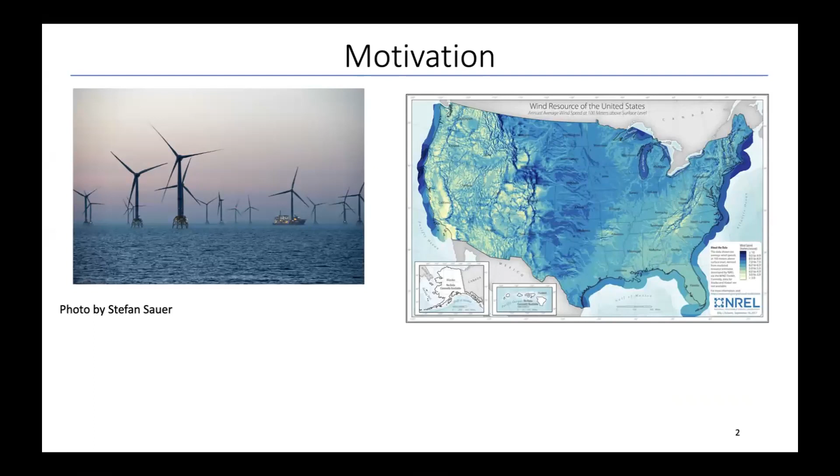So the first question is, why offshore? If you look at this map here on the right, you can see a resource map for wind speeds. Both the east and west coast of the United States have very high wind speed, which is suitable for wind energy extraction. This is the wind speed at the hub height. And the second thing, as you can see on the left, there are no mountains, no land, no houses. It's a lot of available space to build these turbines. So you have faster wind speeds and more space, so you can generate more energy.

And there is a national target in the US where you want to have 30 gigawatts of energy by 2030. And we do have that much capacity. Currently, the estimated offshore pipeline is around 40 gigawatts. So we are going in the right direction to generate more clean energy offshore.

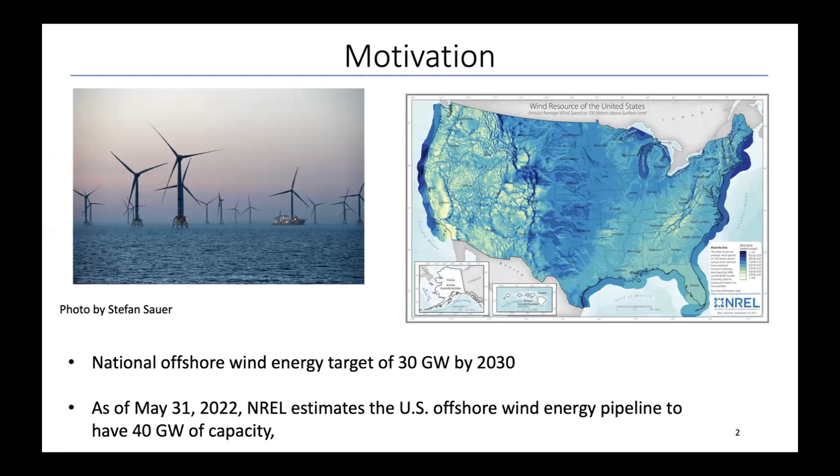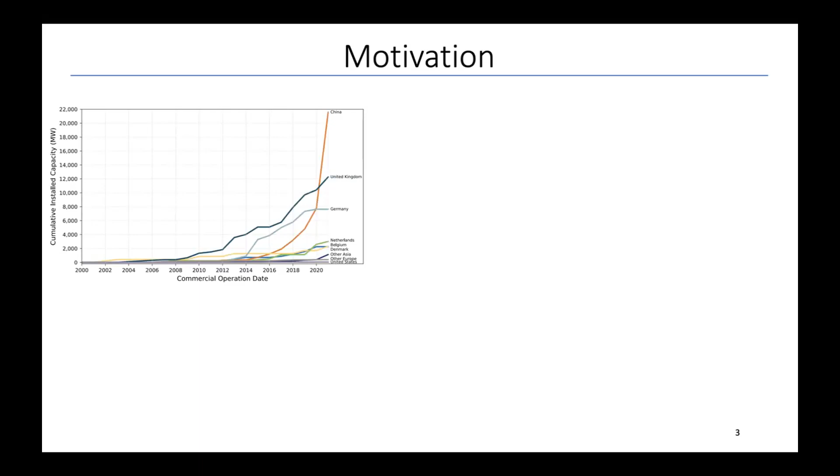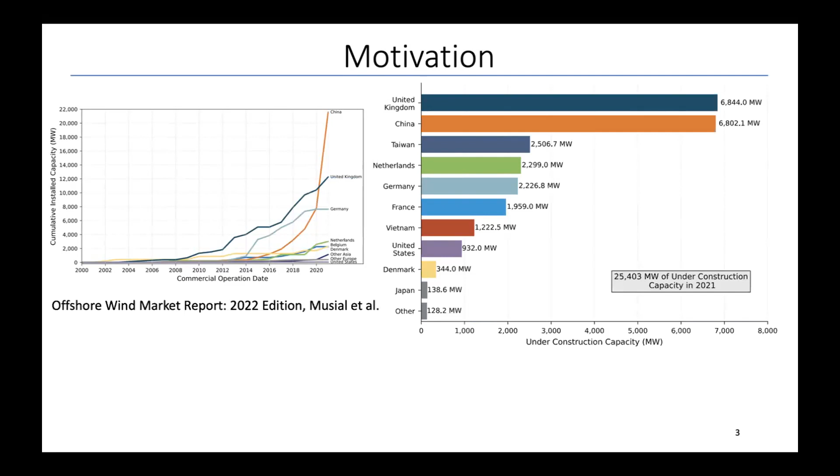If you look at this graph here, you can see that historically the major leaders for offshore wind energy have been China and UK, and the US is somewhere down in the bottom. But this is improving. There is a lot of under construction capacity in the US as of 2021, and this number is just going to keep growing. The hope is we also have this exponential rise that matches the other graphs up there.

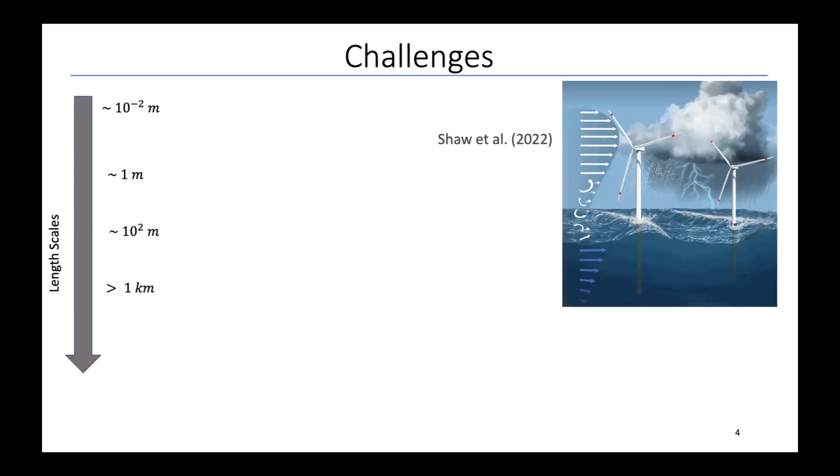And the main challenge is something called separation of scales. You have processes happening right from the centimeter scale, where you have the near surface wind-wave interaction that controls momentum transfer from the waves to the wind and vice versa.

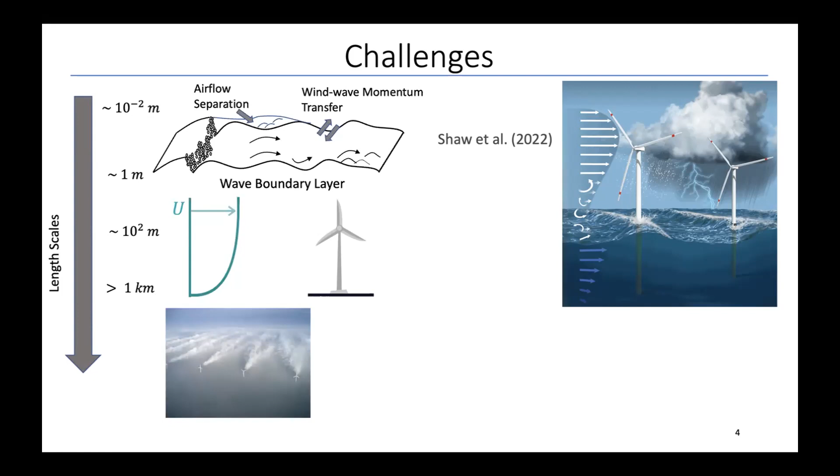Then the next thing is you have the boundary layer itself and wind turbines, which are of the scale of, say, hundreds of meters. You need to resolve both the small part and the large part. If you go one step further, when you have these large offshore wind farms, you have these giant wakes of the order of a few kilometers that you also need to account for, because these wakes interact with each other and influence the total power you can extract from these offshore winds.

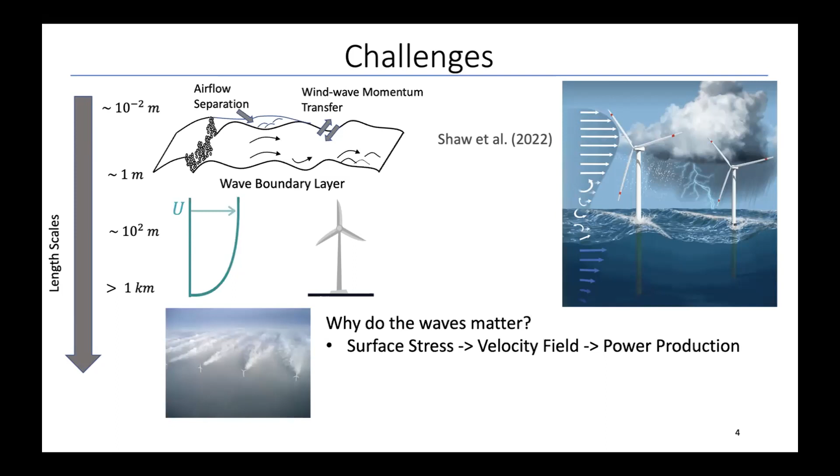Right? So the question I want to address here and talk about today is, why do the waves matter? Very simply, what it does is it sets what the surface stress of the ocean is depending on the wave scale. And what that influences is the velocity profile in the boundary layer. And the power is proportional to the cube of the velocity. So depending on what velocity you get at the hub height, you will predict power. So this is something that is controlled by the system.

The second thing is, you can also have direct influence of the waves on the turbulence and on the flow in the atmospheric boundary layer, as it extends to around a wavelength in height. And if you go further offshore, you can expect waves to be around 30 to 60 meter wavelength. So you can see that it's a considerable portion of the boundary layer that is affected by waves. You even have rogue waves or swell waves, which are generated by storm systems, that could be of the order of 100 meter wavelengths. And so that can also directly affect what's happening at hub height.

These control the power extracted. It informs what kind of control strategies you need to use in terms of pitch or torque control for your system. So it's important to study. And a very obvious effect that I've left for last is, when you have floating turbines, you need to know what the waves do, because that defines your wave-structure interactions, fatigue, and loads.

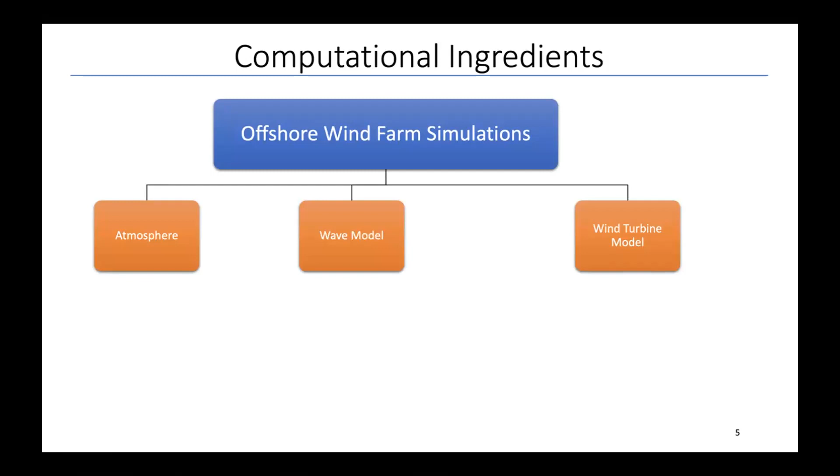So my approach here has been mostly computational. To tell you what computationally modeling an offshore wind farm entails: you need something to model the atmosphere, so the atmospheric boundary layer flow. You need something for the wind turbine. And finally, you need something for the waves. So you have different subsystems that you need to couple and talk to each other so that you get this final offshore wind farm simulation.

Typically what we do for the atmosphere is use something called large eddy simulation that I'll talk about soon. For the wind turbine model, you can do different things: actuator line, actuator disk. The difference mainly is how accurate you want the near-field characterization behind the wind turbines to be. That chooses the method. For now, I want to focus more on low computational costs. So how can we do a lot of these simulations for realistic conditions to give us an input? So we mainly will use actuator disks.

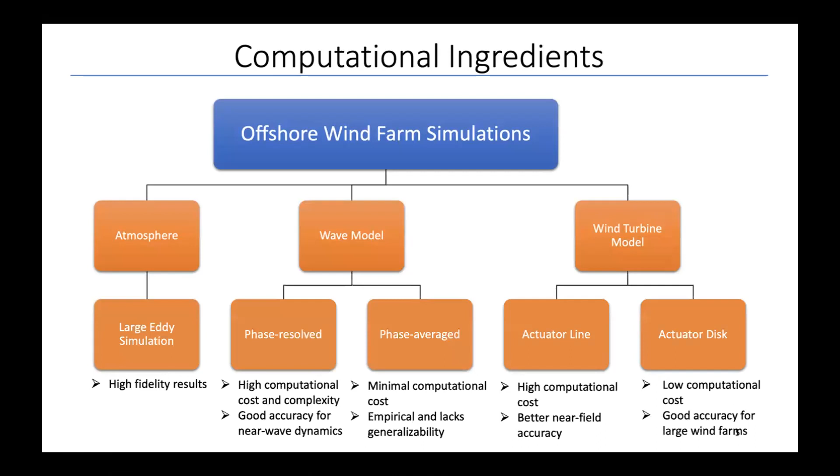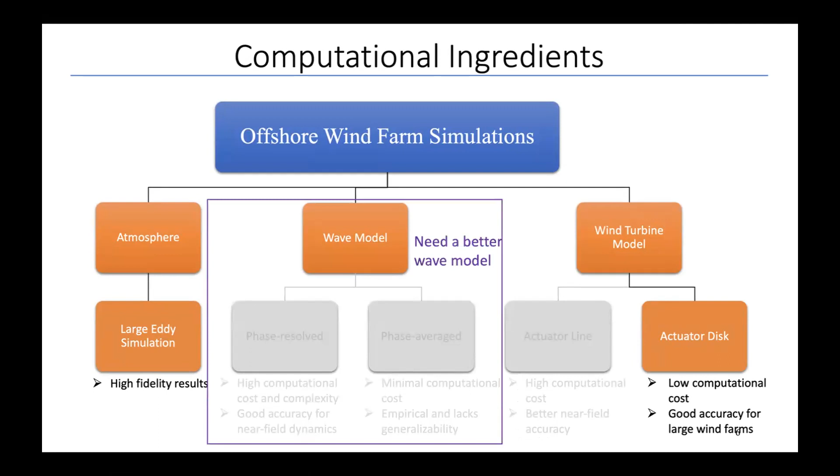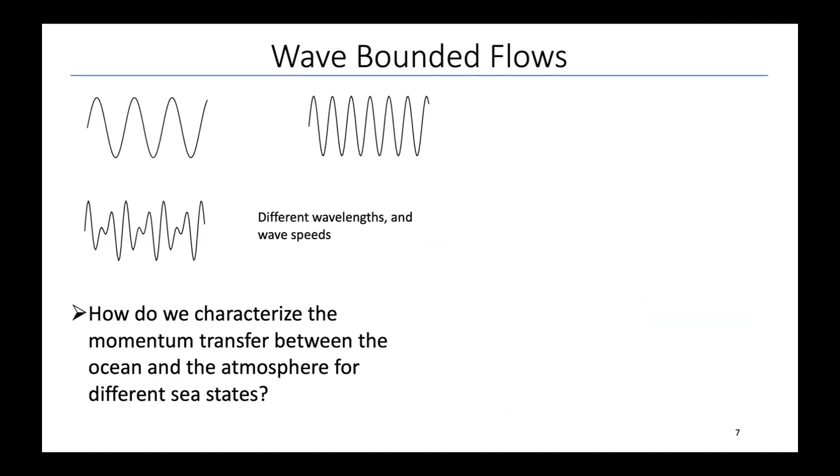For the waves, again, you have different fidelity models that you can use. And again, the trade-off here is in cost. But the problem is that the low-cost models don't give good accuracy. So we need a better wave model to address the effects of the waves on the boundary layer. What I'm going to talk about is something called wave bounded flows. What that means is, we want to characterize how different sea states or wave shapes influence the atmosphere

in terms of momentum. The way this is done typically is you specify the surface stress, and that surface stress depends on the wind velocity and a drag coefficient. In the atmospheric boundary layer, you can assume your velocity profile roughly scales logarithmically, and you can use this information to extract what that stress is. So you see, I've replaced the drag coefficient by the term in the brackets here.

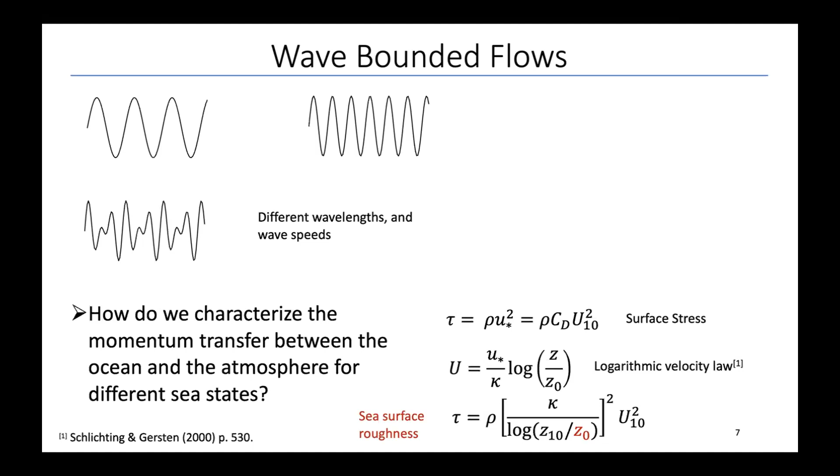Now the key thing that you need to do is to define the z0, which is the sea surface roughness. It tells you how rough or smooth the ocean surface is. And that is what these two types of wave models do. The phase-resolved one numerically resolves each and every wave and calculates things extremely accurately, but with very high cost. So you can't realistically do large-scale simulations with the phase-resolved model.

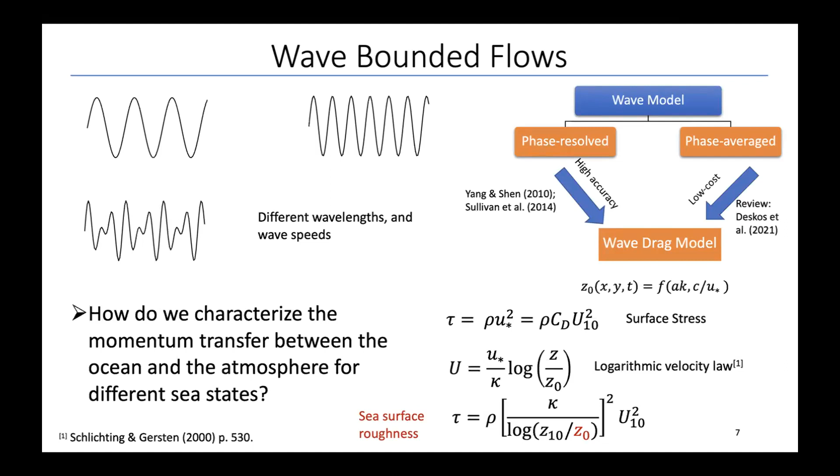The phase average one throws off all the phase information and uses some sort of empirical formula to tell you what that Z0 is. But what we want to do here is to have something that will keep the phase information, but also give you information about the sea states and how that influences the boundary. So how do we do this?

So we use a very simple approach that we say the effect of the wave can be treated as a hydrodynamic force being applied on the air side. And that force is proportional to the incoming momentum. So in simple terms, what this means is, if you have a flow moving from left to right and you have an obstacle, the obstacle is going to extract energy from the flow and impart a drag. And in this case, the wave is that obstacle.

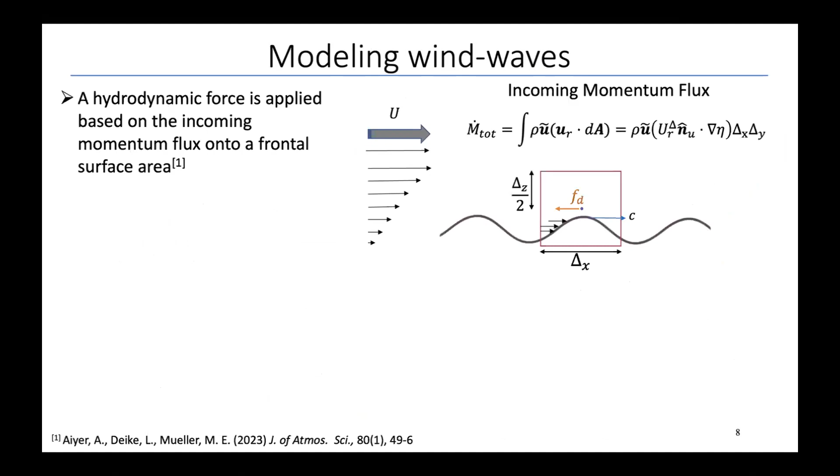So you can do a simple control volume analysis, and you can calculate what is incoming momentum fluxes with the control volume moving with your wave. And you finally end up with an expression like this. It's not that important that you understand every term, but roughly you have a drag coefficient that is dependent on the wave steepness, that's the amplitude times the wave number. You have some term which is proportional to the relative velocity. That means how fast is your airflow compared to how fast is your wave moving.

Which seems obvious, right? If your wave is not moving at all, you'll have more drag. If your wave is moving as fast as the wind, the drag should be less because it's all kind of moving together. The relative velocity is zero. And then you have something that depends on the wave slope. So this is where you're incorporating all that wave phase information. And the way we do it in our simulation, you just have it at the bottom. So you're using it as a surface stress at the first grid point, where your waves are like these moving roughness elements imparting drag on the flow.

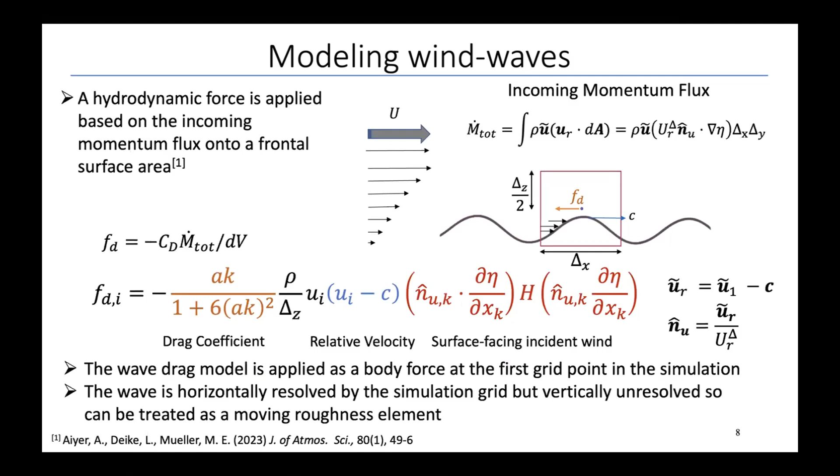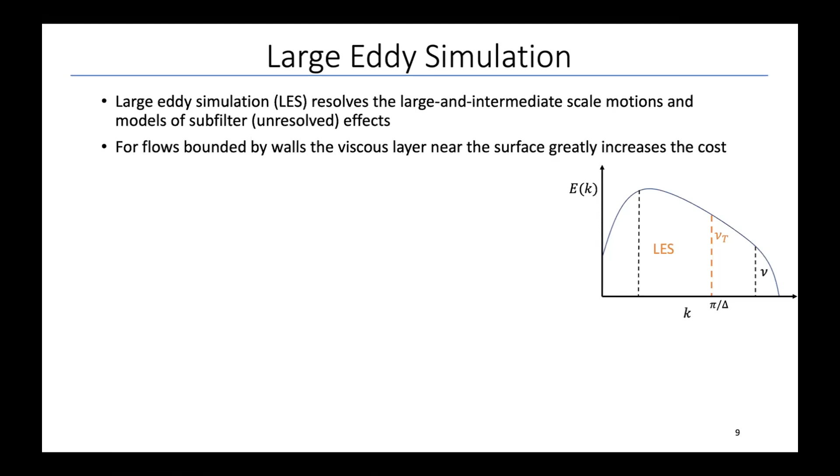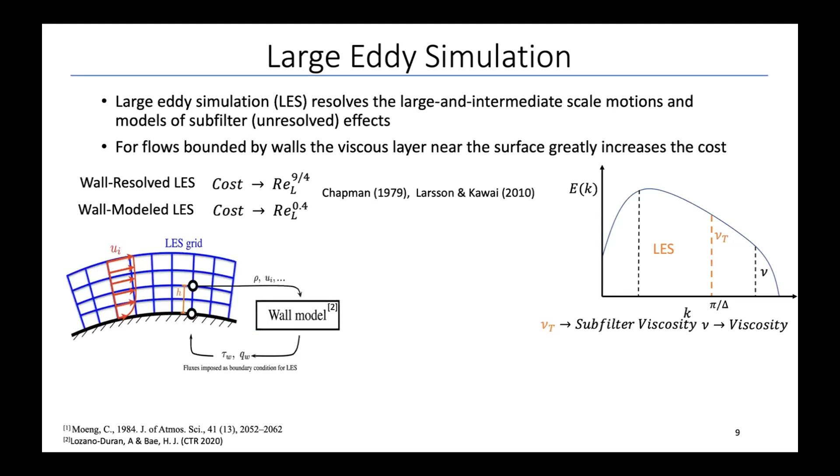But when you add a boundary in that flow, for example, the waves, it introduces another small layer right next to the boundary, which again becomes expensive to solve. So you go one step further and you want to model this effect also. And that's where wall modeled LES comes in. What that does is it takes information from the resolved part of the flow, so the large scales, which are much easier to compute, and it uses that information to specify the effects of the unresolved portions at the boundary. So you're not really solving very close to the boundary, but you're using stuff from further away to inform what that stress would be at the boundary.

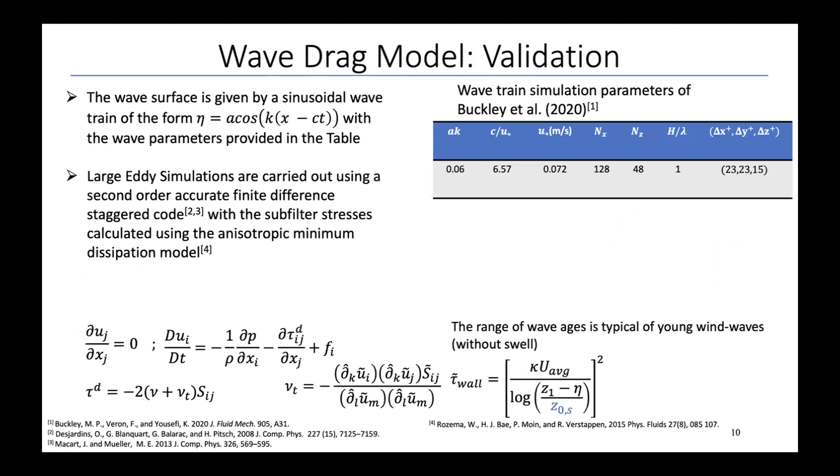Okay, so putting this all together, what you finally have is you're doing these large eddy simulations with a simple monochromatic wave at the bottom. And we use the wave model to specify the wave drag force, and then we want to see whether we can validate this with actual experiments.

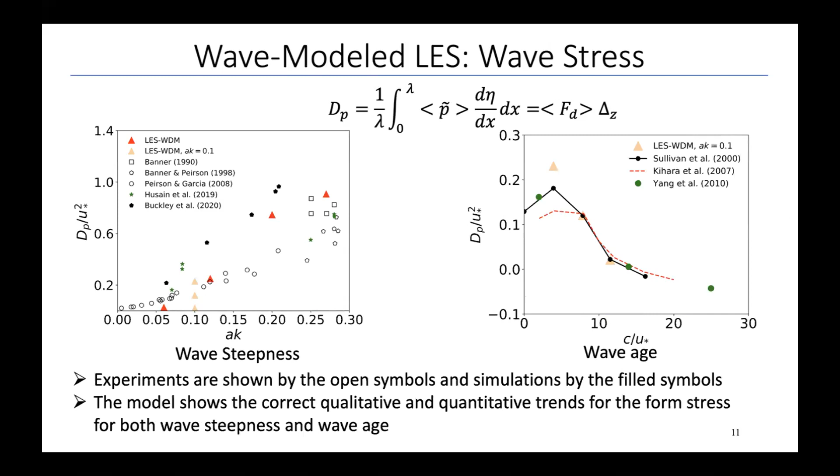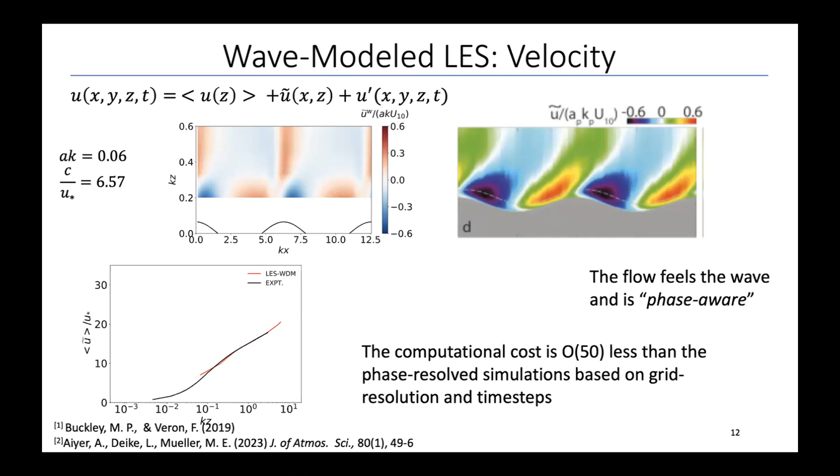And this doesn't mean you completely replace the phase resolved simulations. This means that if what you care about is not like 1 meter away from the wave surface, then you really don't need the phase resolved simulations to do the waves, and this model will work very well.

So now what I showed you is for a simple sinusoid, right? But what do you do in realistic ocean conditions? It's not one sine wave traveling along in a simple direction. What you really have is multiple waves of different wavelengths and frequencies, and they're moving in different directions also. And the way that is typically characterized is using a wave spectrum. So that just tells you how much energy is there in each frequency of the wave. And this is something that you can measure in the ocean and give you what the spectrum would be in a particular area. And so now the question is, how do you incorporate this spectrum into

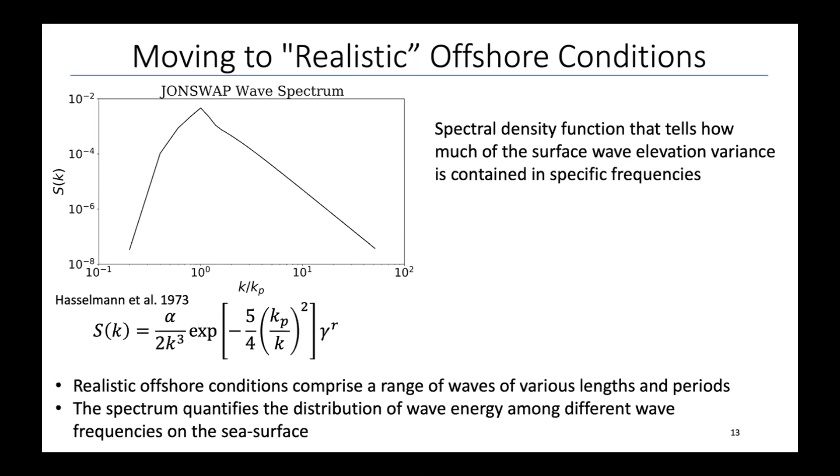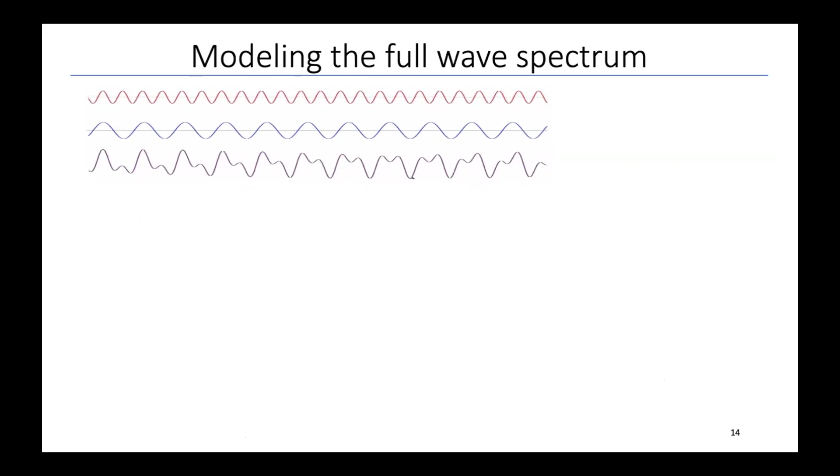Okay, so now if you want to model the full spectrum, for example, I've just shown if you have two waves and you superpose them with a random phase, what you get is something like that. So it has some kind of complexities to it. Now imagine if there are like 50 waves or 40 waves of different frequencies superposed together, you'll get something way more complex. And so the way we do this is we first reconstruct the sea surface elevation by superposing a bunch of waves. And the resolution we choose is whatever we can resolve on a grid. So based on a computational grid size, you have a max resolution that you can resolve.

And you can see on this, this is just a representative sketch, but there'll be a lot of portions of the wave that you can't resolve. So a lot of small scale fluctuations that won't be represented on your grid. And we need to take care of that also, because the total force on your surface doesn't depend on what you're simulating, but what's there in reality. So it's a sum of both your resolved component and your unresolved component. And so now the question is, how do you put this unresolved component back into your model when you have these realistic ocean cases?

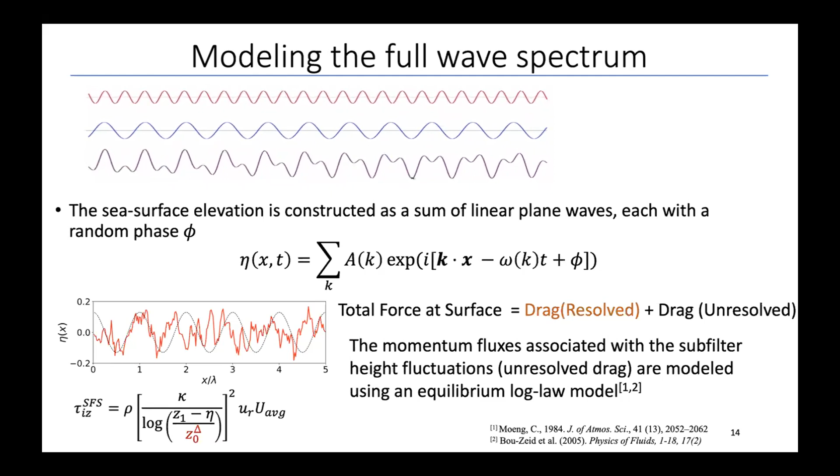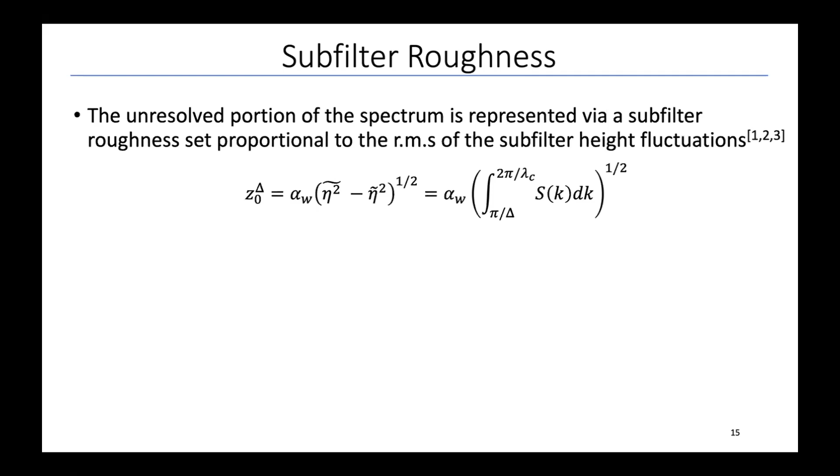And we use a trick of self-consistency here. So what that self-consistency condition is: regardless of what grid spacing I use in my simulation, the total stress at the surface just has to be the same. So if I resolve something at scale delta or I resolve it at scale 2 delta, the total average stress has to be the same, because it's the same wave.

And you get this by using this equation, you get a self-consistency with one unknown, which is alpha, and you can solve for it during the course of your simulation. So you dynamically update alpha as your simulation progresses, and you don't have to make any assumptions of its particular form. The only assumption here is that alpha is the same at both scales. So there is a scale invariance assumption baked into the self-consistency condition, that your alpha doesn't change with respect to scale.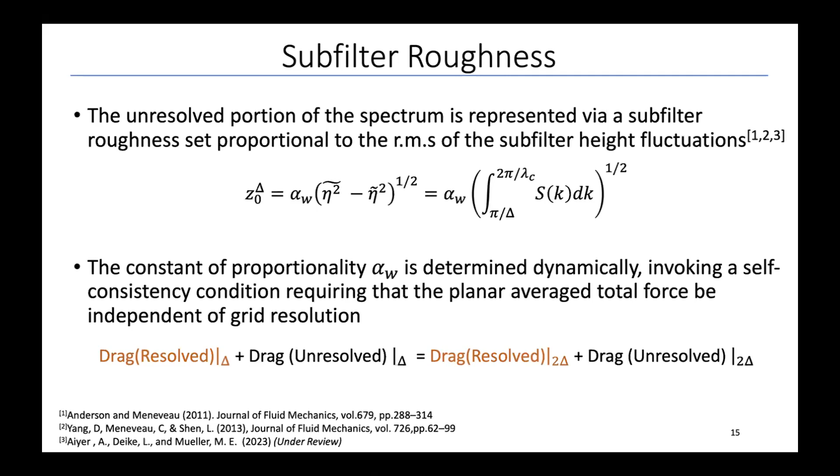Okay, so now we put this all together. I've shown you what to do with the atmosphere, what to do with the waves. Now, finally, you have wind turbines.

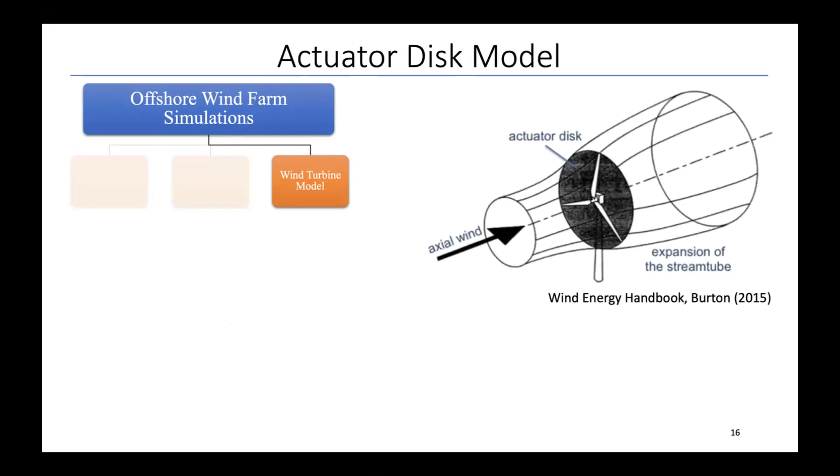We use a very simple approach called the actuator disk model. What it does is it says that the wind turbine is like a drag producing disk that extracts energy from the flow. And then you can calculate what that drag is, based on simple momentum theory, to be proportional to the area, the square of the disk average velocity, and some thrust coefficient. So this is the wind turbine model.

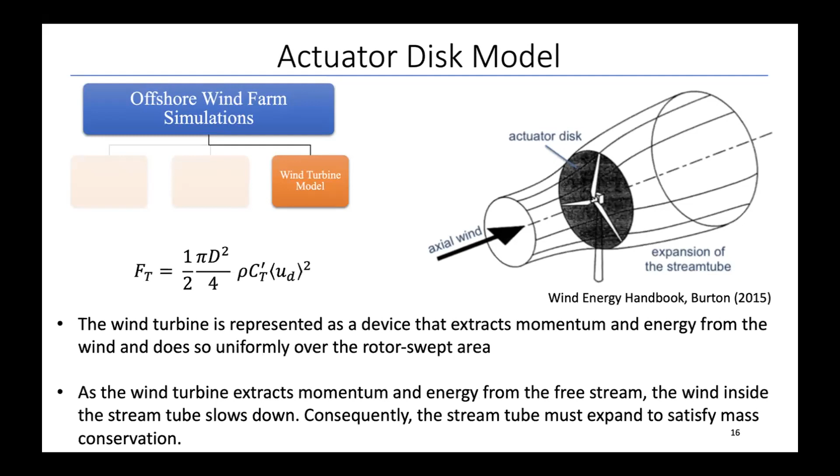And the thrust coefficient is something that depends on your blade, the particular airfoil you use. And in simulations, we're kind of agnostic to it, because this is information you get from experiments and tables of what the lift and drag coefficients are for particular airfoils.

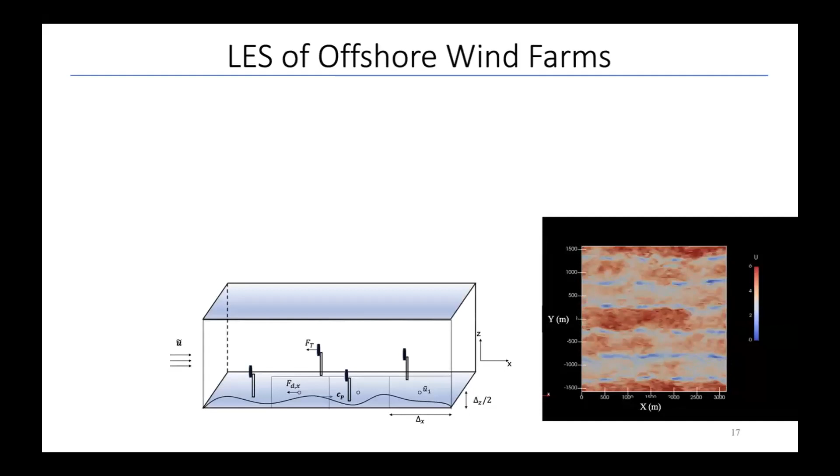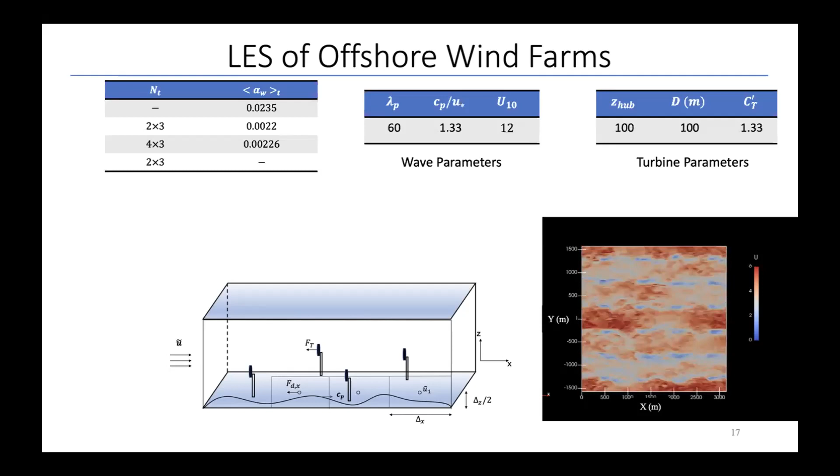Just to give you some idea, I have a simulation here for an offshore wind farm, just at different configurations. The important points here: you have a wave of wavelength 60 meters, your turbine hub height is at 100 meters, and the diameter of your rotor is also 100 meters. So it's a 100-meter high turbine encountering waves of 60-meter wavelength. This is typical for offshore, deep offshore conditions. Okay, so this is other grid kind of details.

And so the first thing you want to look at is just how does the flow look like. You can see that it's a highly turbulent flow. You have a wake structure developing behind the turbine, that initially you have a low momentum zone, and then due to turbulent mixing, that wake starts dissipating.

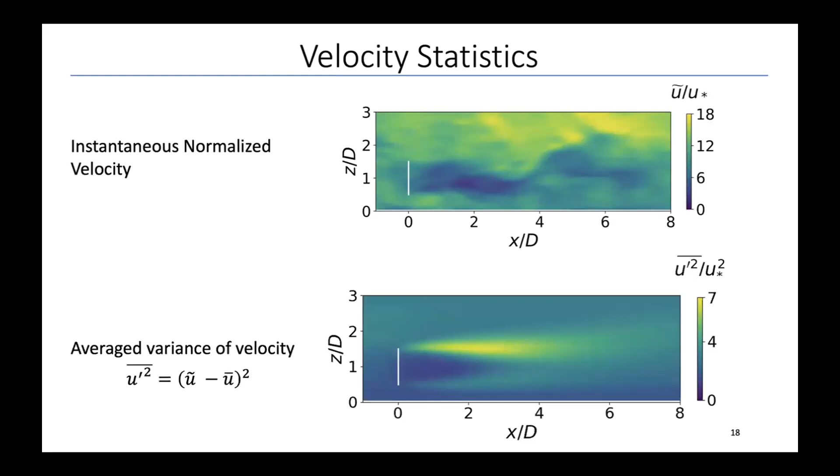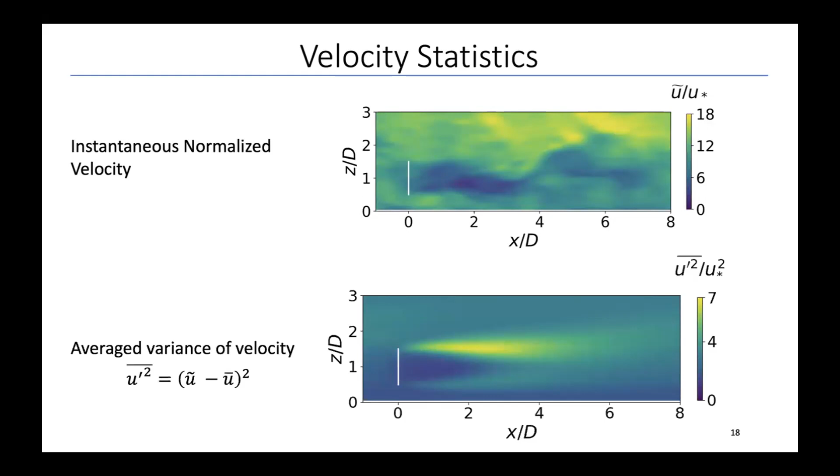And then if you look at the velocity variance, this is a measure of the turbulence in the flow, so it gives you what turbulence intensity is there in the flow. You can see that it's very high near the edges, as expected — you have more turbulence and more mixing near the corners. Also the magnitude of this increases as you go away from the ground, that's because your velocity is also increasing. So you have a faster velocity hitting an obstacle versus a slower velocity hitting an obstacle at the bottom and top edges of the turbine.

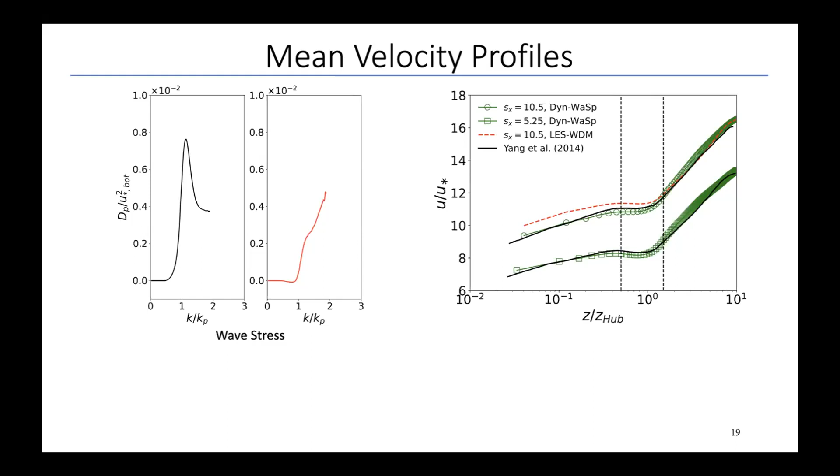So you can see the discrepancy in the lower half between the simulations and the one without the dynamic model. In the upper half, everything's roughly equal, and that is expected, because you don't expect your waves to affect something 1,000 meters above the surface, which is the height of the domain. But you expect it to have some influence at the hub height, which is in the middle over there.

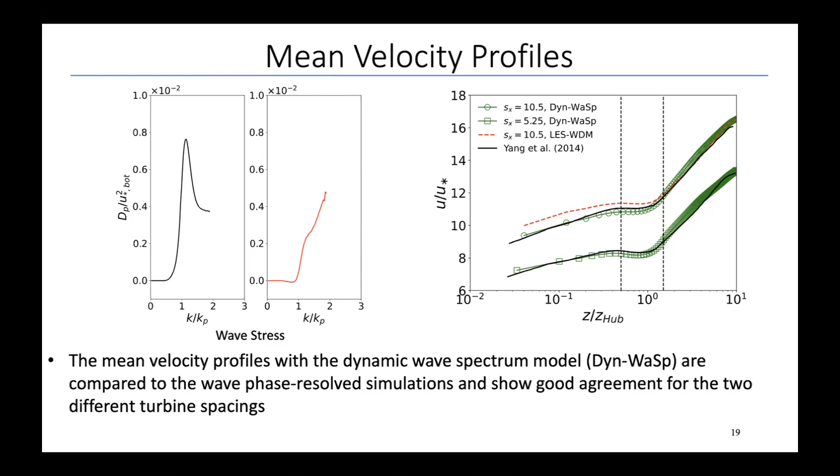So finally, I hope this can convince you that the dynamic model is necessary, and also you can simulate the full wave spectrum in this form for realistic offshore conditions.

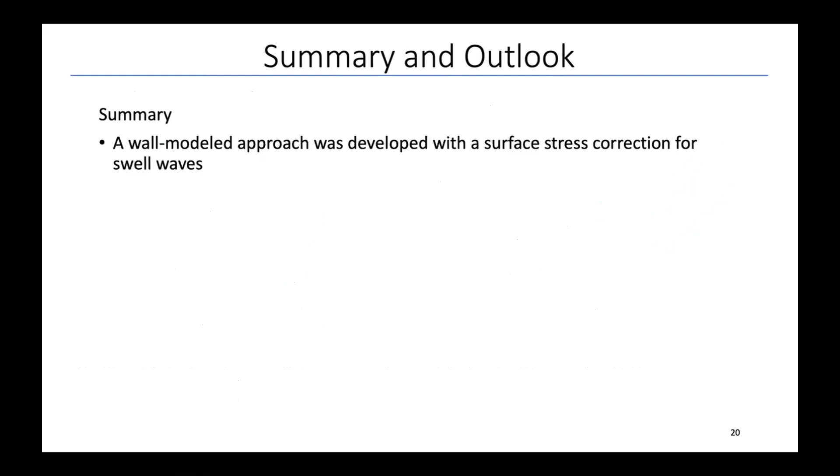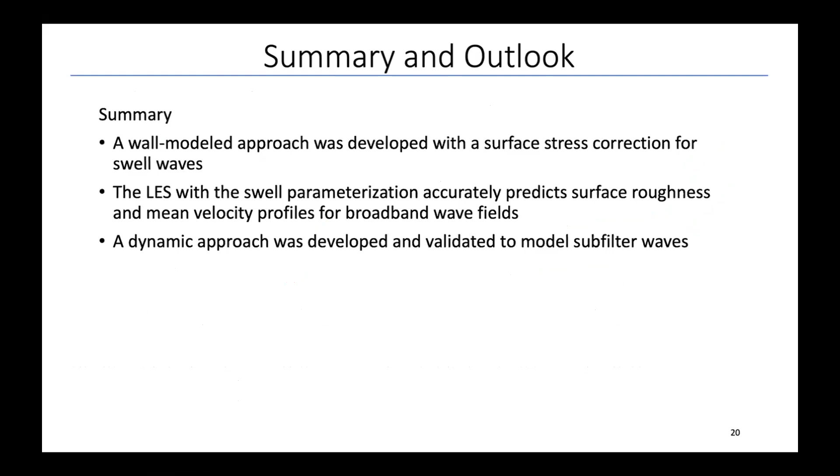Just to quickly summarize, this is a wall modeled approach where you don't really have to resolve all of the waves, but you have a physics-based method to apply the correct stress. You can do it for both simplistic, narrow-banded, and broad-banded spectrum. It doesn't derive the spectrum, but given a particular spectrum for the place you need to study, you can use this model.

This dynamic approach allows you to use it without having any kind of empirical tuning constants. The main takeaway for the wind part is, now you have a model that's 10 times cheaper than what people do for wind turbines. Wind turbine simulations are anyway very expensive, and when you add the wave solver, it becomes even more expensive. So it's 10 times cheaper just based on grid spacings you can use with this model.

Something I'm not showing here, which also adds to the cost, is all these phase resolved models have a separate wave solver. So they have something for the airflow, but they have another potential flow solver for the waves that also adds to the cost. It's also very simple to implement because you don't have any terrain following or remeshing stuff that you need to do. So these are things that can easily be taken and have portability across different kinds of simulation codes, and can be tested very robustly in that sense.

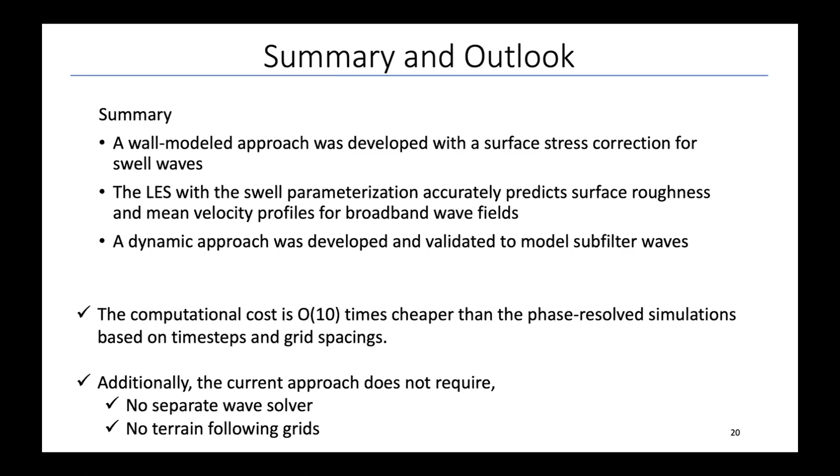So with that, I'll be happy to take any questions. Thank you.

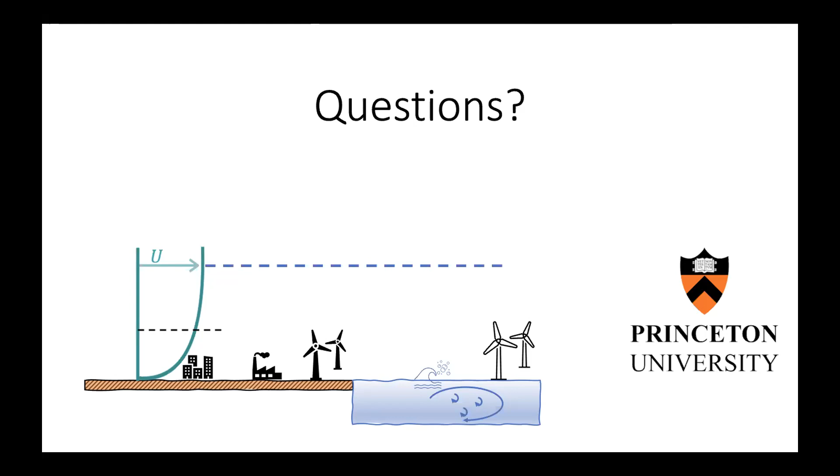You have two scalings for the computational cost, one that is Reynolds number to the 9/4 and the other 0.4. What's the difference between that?

Right, so when you don't do DNS, you don't have viscosity resolved. Technically, large Reynolds number LES is Reynolds number independent because you don't have any viscous layer you need to resolve. When you put a wall, you again get a Reynolds number dependence because you have a viscous layer near the wall, and so wall resolved LES is almost as expensive as DNS.

And now in wall modeled LES, you're again removing that viscous layer and modeling it, so you're again roughly Reynolds number independent, but it's like a 0.4 scaling, a very weak scaling. So the difference is just having the wall. Thank you.

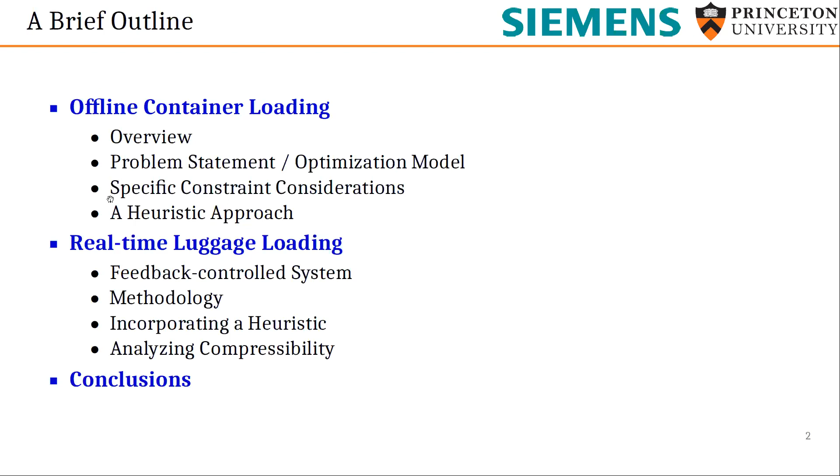And then I'll shift gears and talk about the airline application and the real-time loading of luggage, why that application needs to be feedback controlled, some of the methodology that we use in order to replicate that, what happened when we incorporated a heuristic, and then I'll end the talk talking about compressibility of objects and why considering that is really important to achieve some of the targets that we have. And then we'll conclude.

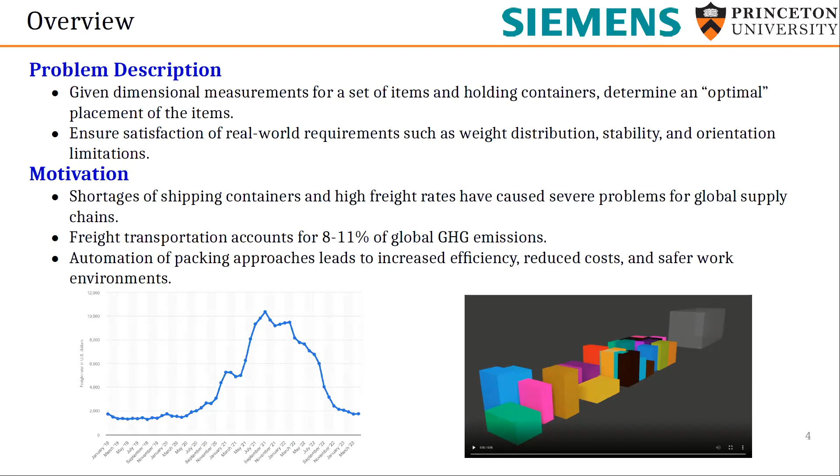On top of that, we know that 8 to 11% of global greenhouse gas emissions are due to freight transportation. And then as we get to the end of the talk, the automation procedures are, of course, designed to increase efficiency, reduce costs, and improve the safety of our working environments.

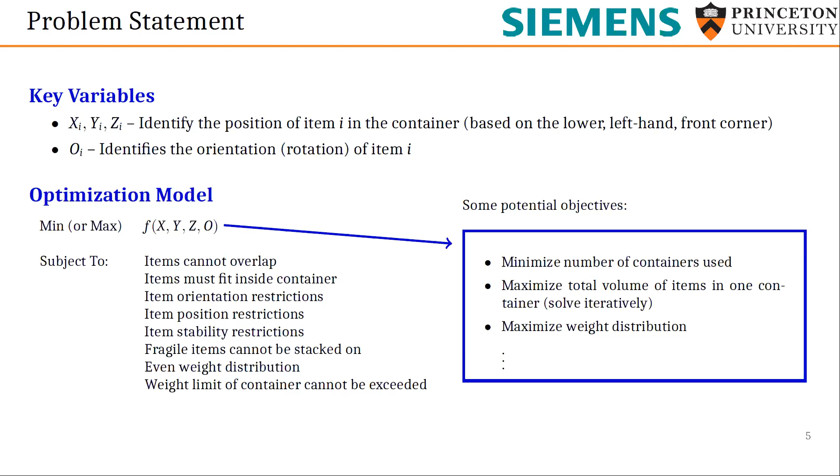So the novelty of this work really isn't the constraints that we're considering, although there is something to that I'll talk about in a moment, but really the fact that we're considering all of this stuff at the same time, right? Because in the literature, all these things have been proposed, but most applications don't consider them simultaneously. So there's a big challenge in trying to do that. So I'm going to highlight one of these in particular, and it's going to be the stability restriction, because for a couple of them, in addition to the fact that we're considering them all together, we also think of them in a little bit of a different way than they're thought of in most of the publications in literature.

So up on the top right here, you see an image of a packing application where stability restrictions aren't considered at all. Right, so you have objects that are like floating in the air, or they're almost definitely going to fall over as soon as we let go of them. And so, of course, there's a need for a stability consideration.

So the two things that are done in the literature are a vertex-based approach, where we pick some number of vertices that need to be supported. When I say supported, I mean they're either on the ground or there's an object directly below them that doesn't fall. Right, and so usually that number is 3 or 4. Or there's a percentage-based approach where you specify that a particular percentage of the bottom surface of an object needs to be supported from below.

So I'm going to do a couple of quick thought experiments to show you why these two approaches are a little bit lacking. So in this first one, you can see a side view of a packing scenario and a top-down view of the same thing. And of course, in a vertex-based approach, this is a valid packing, right? But as soon as you try to switch to a percentage-based approach, there's no way that you would ever want this to be valid, because there's probably less than 25% of the bottom surface that's being supported.

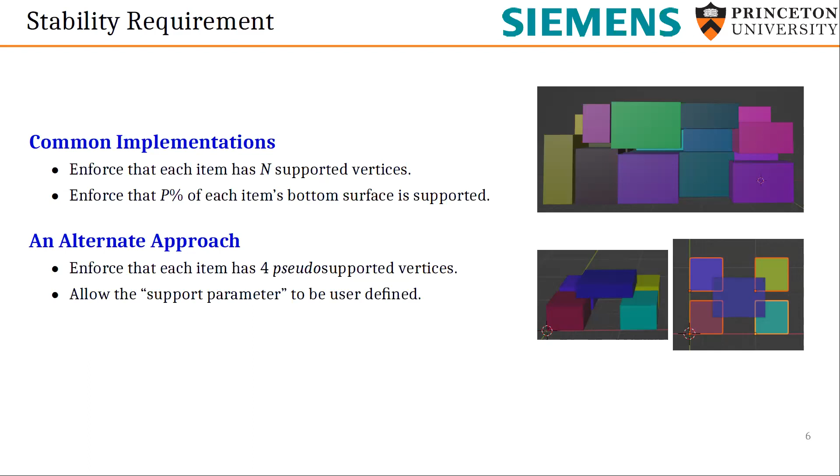And so if you take that approach, 25%, and you allow for other things to satisfy that same restriction, you're going to get a bunch of stuff that falls over, right? But now take an alternate view and a different packing scenario. So in this one, we've got a great percentage of the bottom surface that's being supported, but we don't have the 4 vertices, right? So you can see from these two scenarios that neither one of these two approaches is very holistic on its own.

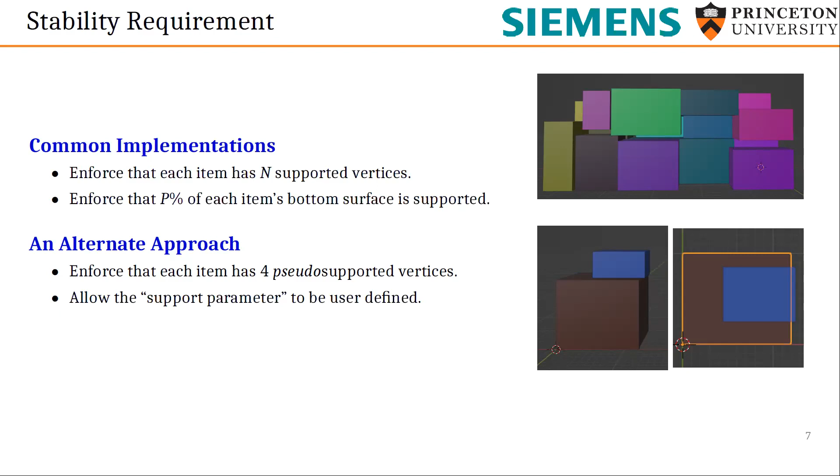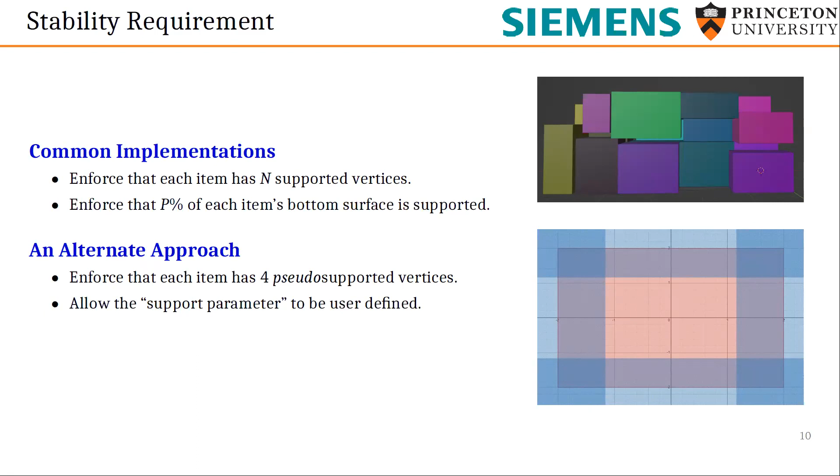So we did some other things for the weight distribution constraints and some of the other sets of constraints where we sort of modified the way that we thought about them. But again, the power here is that we're putting all of these things together all at the same time. So with that, we had a pretty good optimization model that we're happy with. And of course, the difficulty is with all of these constraints considered simultaneously, it takes forever to solve, right? So we implemented a heuristic, but not exclusively a heuristic, like it's frequently done in industry. So we merged the heuristic approach with our optimization approach so that we could get the benefits from both.

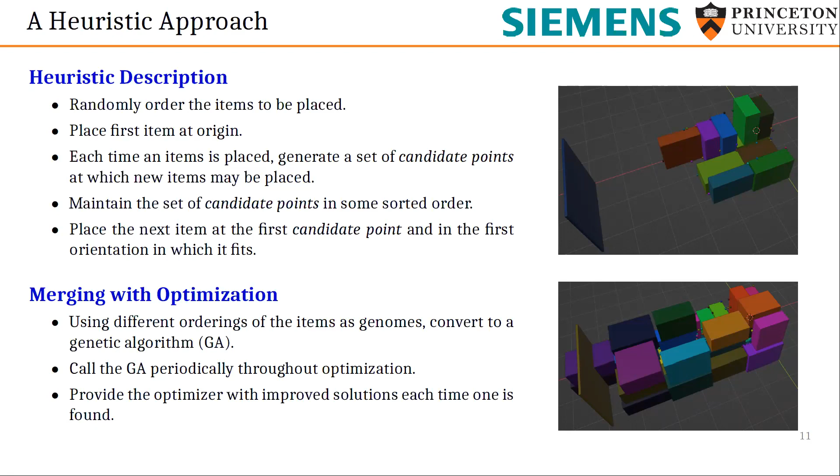The problem here is that the solutions, although they're valid and they're quick, they're not anywhere near optimal necessarily, right? So these are 25 items that should fit inside this container, but with the heuristic approach, this plate right here is supposed to be the back wall of the container, and 2 of the items don't fit, right? So we can merge the heuristic with our optimization by converting it to a genetic algorithm. So we change the order in which items are placed. We can call the genetic algorithm periodically throughout the optimization process using the optimizer's callbacks. And then we can provide those new solutions to the optimizer in order to help move it along.

So a couple of results here. This is the same scenario where I have 25 items I want to pack. Again, this solution is generated in a fraction of a second. Back here, what you're seeing is a couple of objects. They're not supposed to be floating in the air. They're supposed to be set on the ground in the back, so they're sort of saved to be packed in another container later.

If I run the same scenario using only the optimization without the heuristic and let it run for 5 minutes, I get a very different orientation for all of the items, but essentially the same result. There's a couple of objects that weren't able to be fit and need to be stored in another container later. But when I put the heuristic and the optimization together, this solution is generated in just about 30 seconds, where all 25 objects are oriented in such a way that they can be placed within a single container.

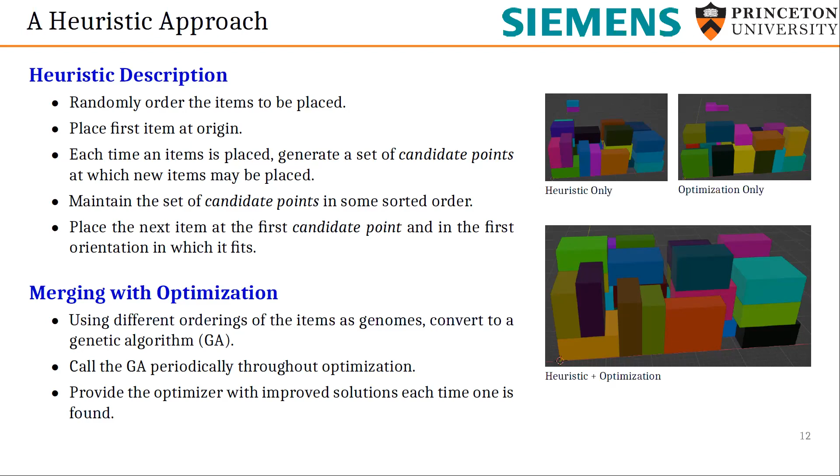All right, so here's where I'll switch gears and I'll start talking about automation of this process, and particularly an application for airline load. So after we've been working on this previous project for about a year, Siemens came to us and they said, hey, we have some colleagues over in Germany. They're working in our airport logistics division. And we think that the application that they're working on would be a great thing for your application. So your algorithm that you're working on is a really good foundation.

So the idea is that when people check luggage at the airline or at the airport, they're loaded into these unit load devices or ULDs. And currently that process is done by humans, right? So the objects show up on a conveyor belt and people manually load these ULDs. So Siemens said, we'd like to automate this process. We'd like to have robots, we'd like to have perception systems, video cameras, things so that we can get better tracking, so we can get better efficiency, we can save people from getting hurt and all these kinds of things.

And we said, okay, great, but why aren't you doing that already? And they said, these two issues, right? So deformability and slipping and toppling. Basically, the applications that people have been working on were very similar to what we had been doing, where you know all the items ahead of time, you come up with some packing structure, you start putting stuff in.

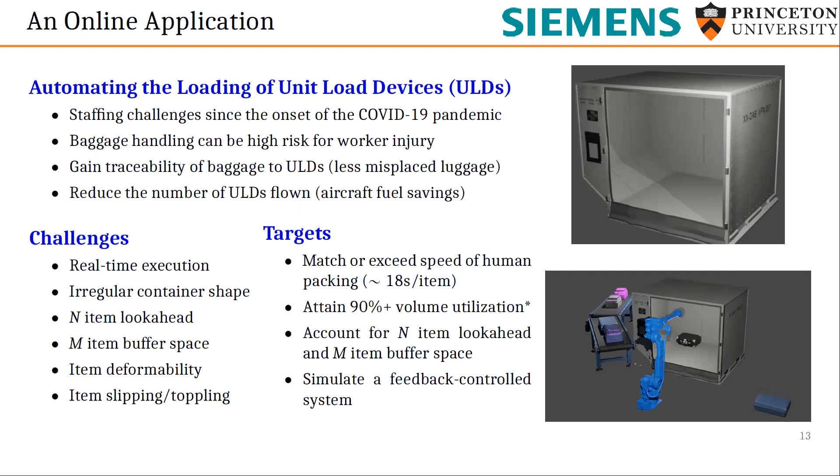So how does the feedback control system work? Well, basically we have a perception module that does two things. It scans luggage that's arriving on the conveyor, and it tells us what the dimensions of the luggage are. And then the other thing that it does is it scans the ULD, and it tells us about the current state of the system. So it tells us where things currently reside.

And then that information is passed to the packing module, which is our contribution. So we're using the Gurobi optimization software in order to determine a particular packing plan. And then that packing plan is shipped off to a robotics module that's tasked with actually implementing the plan. I'll give a little bit more nuance to the approach in a second, but that's the basic idea.

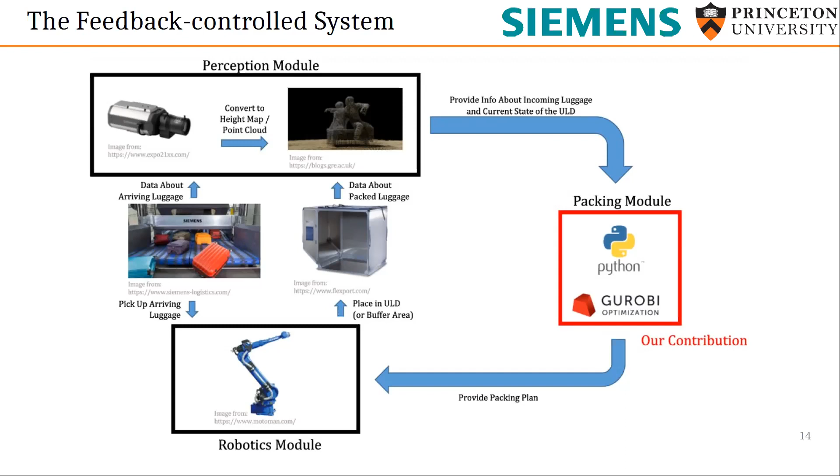So in terms of implementation, that's kind of represented using this flow chart. So we start with an empty ULD. We then get data about n items that are on the conveyor. So throughout the rest of the talk, unless I say differently, let's suppose that n is 5. So we know the dimensions for 5 items.

And then we're going to compute an optimal placement for those 5 items with the restriction that the first item that comes off the conveyor needs to be in a position where it can be packed, right? So when I pack those 5 items, the first item can't be on the top because then it doesn't make sense for the robot to try to place it there because it's just going to fall.

So then we check to see if any of the items fit. If they do, we simulate the robotics module, which is basically just place the item where it's supposed to go. And then we simulate the perception module just by writing back and forth to some spreadsheets. Obviously, these things would be taking the place of a realistic application, and there may be some other simulation that could be utilized in between here, like a physics simulator that says, okay, this object's going to fall and the current state of the system should change and things like that.

But once we pass the information back from the perception module, what we have is just a height map. It's just like for every XY point, we know the height at that current location. Right, so we convert that to some set of mock items that are used within our optimization approach, and then the process repeats.

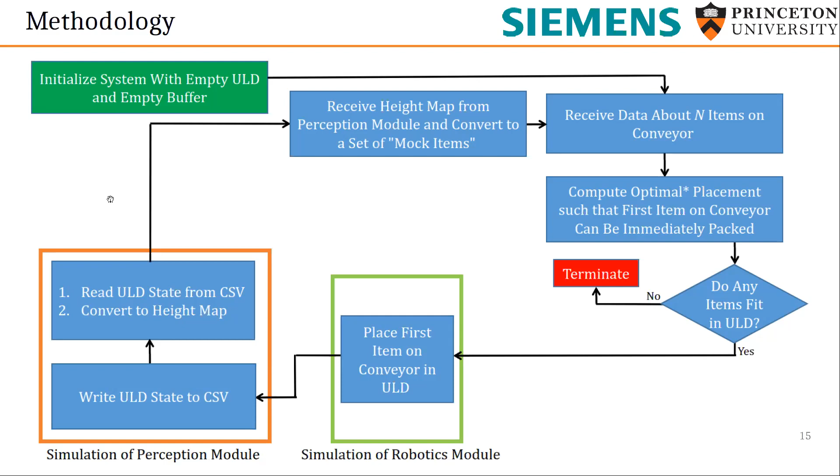So early in the process, we weren't getting very good results. We weren't anywhere near that 90% volume utilization target. We were also taking way too long to pack each item. So we cleaned up the code. We added some different considerations into what constraints we were using and how we were implementing them, and made a variety of changes in order to obtain much better results, right? So we're now packing 7 seconds per item, and we've increased at least the best performing objective to get a little bit more volume utilization.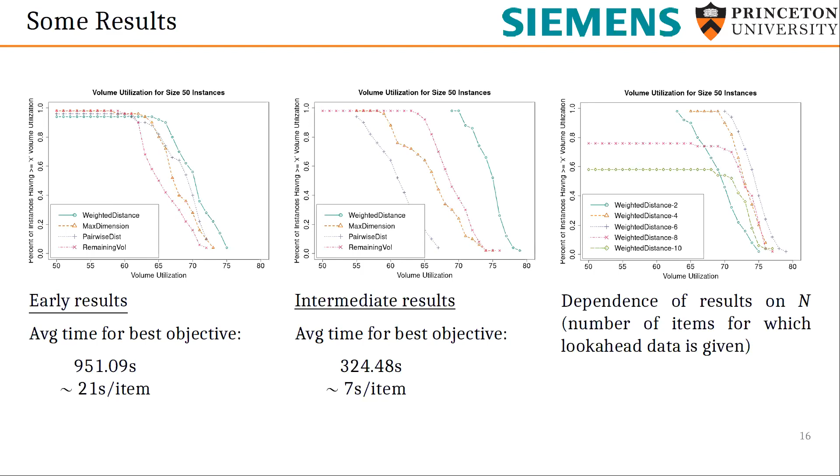So in order to try to combat that, I'm not going to go through all the details, but we incorporated a heuristic in a similar fashion to what we did in the first project I talked about. And it didn't do exactly what I wanted to do. I was hoping that with a 12 or 14 item look ahead, I'd really get that 90% volume utilization and everyone would be happy, but that's not what happened.

And it kind of makes sense if you think about the Tetris game too, right? If your screen lines up with like 10 items that you know ahead of time, it's just overwhelming, right? There's too much information. It's not really going to be that helpful. So we got over that hump of performance degradation because we weren't getting anywhere near optimal solutions. But now we're sort of plateauing where we're not getting better performance because we know about more items.

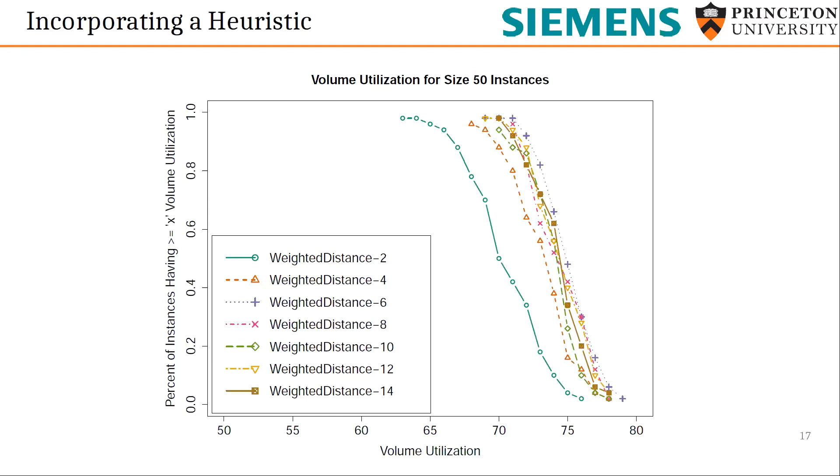So the last thing that really I had in my back pocket at that point was, well, what about compressibility of the items? So we got a hold of our colleagues over in Germany and we said, can you do an actual experiment for us? Can you load real luggage with real clothes? Can you put it in a real ULD? And can you tell me what happens? And they said, sure, we can do that.

So they took 45 luggage items, loaded them with clothes, stacked them in the ULD. They didn't use any kind of look ahead limitation, so they knew about all the items. They just picked which one they thought would be best for each location and so on. And so they came back to us with the data a couple weeks later, and I asked 3 questions.

First of all, does anything compress when we put heavier items on top of it? Do we get any compression? Because that would help me. And I was really surprised by this number. They said on the bottom layer, we got up to 25% compression for the items. I was expecting 5 or 10%, but they said 25%. So I was really impressed.

The other 2 things I said were: one, do you consider this ULD to be full? And they said, yes, we do. We fit 45 items, there's not a lot of room at the top. I said, okay, what's the volume utilization? And they said, we don't know. So I rolled my eyes and face palmed for a little while.

And then I calculated the volume utilization and I told them, your volume utilization here is only 78.72%. So if this is what you're achieving and you're calling it full, why are you telling me I need to get 90% volume utilization? And they said, we don't know. So basically what I think is happening is they have some competitors on the market that are saying we can achieve some 90% volume utilization, but they don't have a real metric that they're using. So they came back to us and said, look, just call it full if we get 45 items or more.

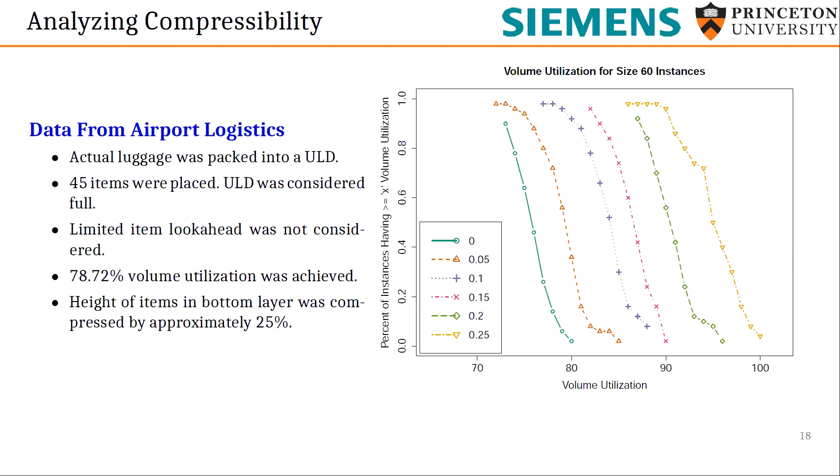The lines you're seeing here are all based on assuming that every object placed in the container can be compressed a certain amount in the Z direction, so its height is being compressed. As you increase the compression for each item, you significantly increase volume utilization, because you're using the original dimensions when computing volume, not the compressed dimension. But this, of course, isn't realistic.

So I looked at what happens if things on the bottom are compressed more than things at the top. I implemented a linear change in that compression factor, and to be conservative, I said at the bottom of the container we assume 20% compressibility. Once we get to 130 centimeters, since the whole ULD is about 160 centimeters, we stop and say compressibility is zero.

These are the results I've seen. I'm not hitting their original 90% volume utilization target, but I'm well over the 78% they told me was full. And I'm doing quite good in terms of timing, because this still leaves about 8 seconds for a robot to manipulate the item location. That's where the project stands at the moment.

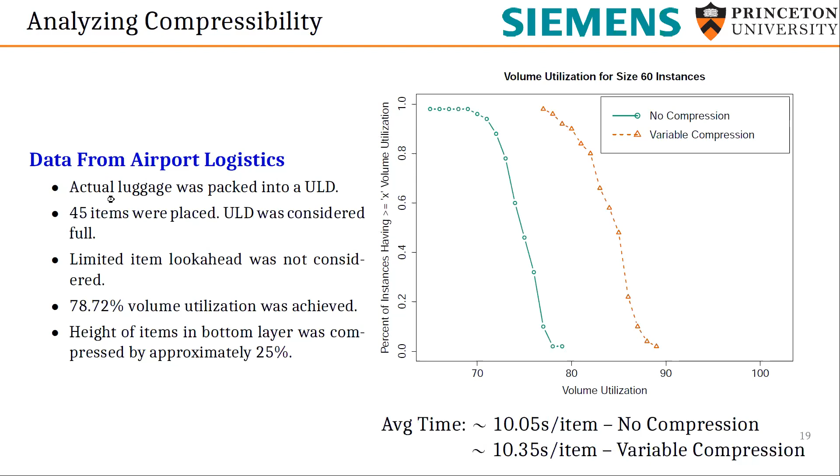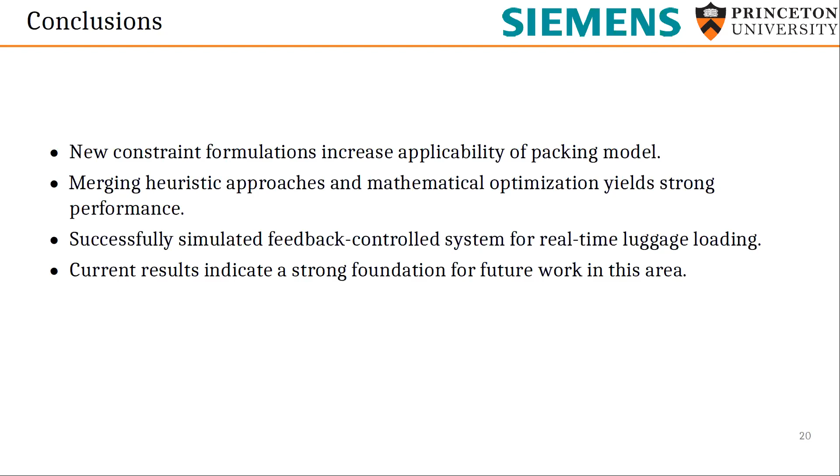So with that, I'll conclude. I talked about a couple of new constraint formulations that help increase applicability of the container loading problem, and in both applications about how merging a heuristic with optimization can improve performance. We've successfully simulated this feedback control system with a perception system and a robotic system, and our current results look pretty good, but I guess that's for students to decide.